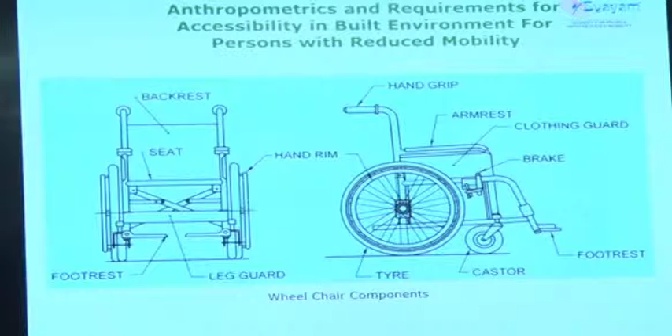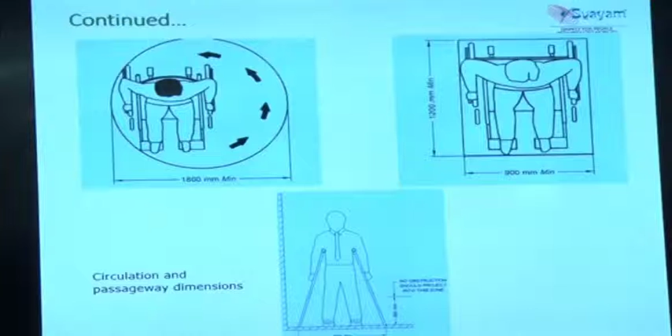For example, to make a 360-degree turn, you require 1800 millimeter minimum for a wheelchair, for activity space in front of any fixture, for example a wash basin, or a mirror. You require this much space for a drinking water fountain or an ATM. So you require a 900 millimeter by 1200 millimeter space for a wheelchair to go and the person can use that fixture. Similarly, you need 920 millimeter for people who are walking with crutches.

It describes very well what height is required for your knee clearance when you're seated at a table. For example, if your knee clearance is not 700 millimeter, you won't be able to bring your knees in under the table, so you will get stuck outside. Imagine a person on a wheelchair, he won't be able to write anything on the table, so it would be almost this far. That's the reason these standards are brought in.

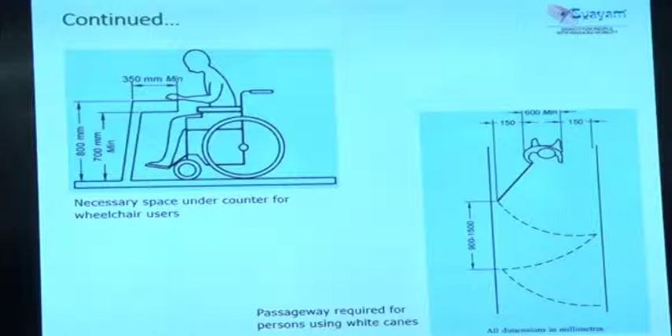For a person who's blind, you require at least 600 millimeter as the body space, and then 150 millimeter on both sides, because typically this is the way you use your white cane to orient yourself in the surroundings. So the picture explains that.

Similarly, in anthropometry, we also look at the common reach zones. When I say common reach zones, I mean zones which can be easily reached by people sitting on a wheelchair as well as people who are standing. This impacts all the controls that we give, and we decide that all controls should be within this particular height, so it shouldn't be too low for a person who's standing and shouldn't be too high for a person who's sitting.

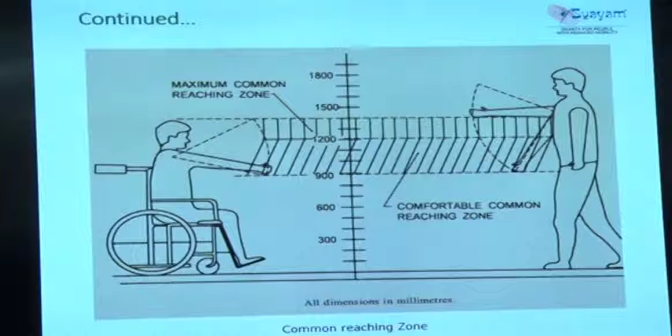It describes the minimum width of walkways and pathways, and how much width is required when two wheelchairs will pass. It also provides for passing spaces where there is lack of space. So there will be a passing space of say 1500 millimeter on the route, where if two people are crossing, one may be able to wait and the other person can cross over.

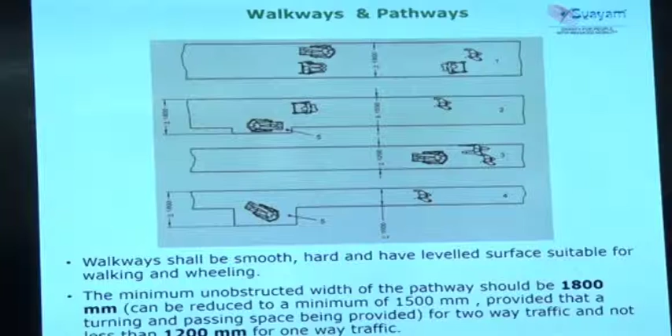It describes ramps and various kinds of ramps. This is a curb ramp. I'm sure those with a civil engineering background would know the difference between a curb ramp and a normal ramp. A curb ramp is provided on a curb which is not more than 150 millimeter, that is one step; if it's more than that, it has to be a ramp. The major difference between a ramp and a curb ramp is that a ramp will have a handrail on both sides, which extends further so people can hold on to it and push themselves up the incline. A curb ramp does not have a handrail, it just has one ramp and two flared curbs, so people on a wheelchair can easily climb.

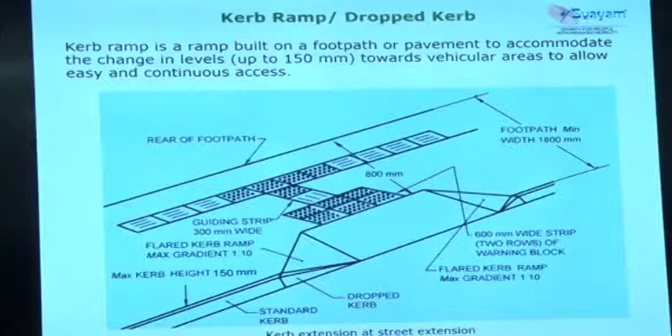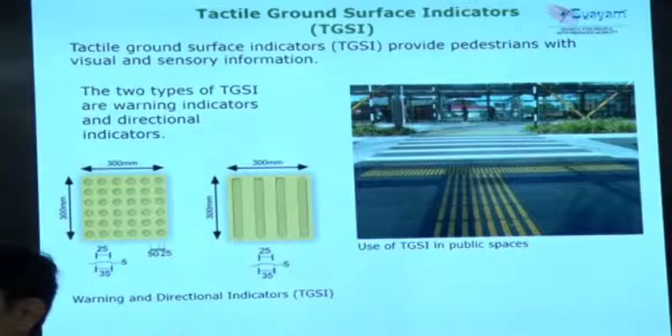It details out the requirements for making an environment accessible for blind people as well, people who have vision impairment. People with vision impairment orient themselves in the environment with the help of cues, cues that may be felt by their stick or felt underfoot. These are tactile blocks, we call them TGSIs, tactile ground surface indicators. You must have seen them in metro stations and bus queue shelters. If you have traveled abroad, I'm sure you must have seen them at all public places.